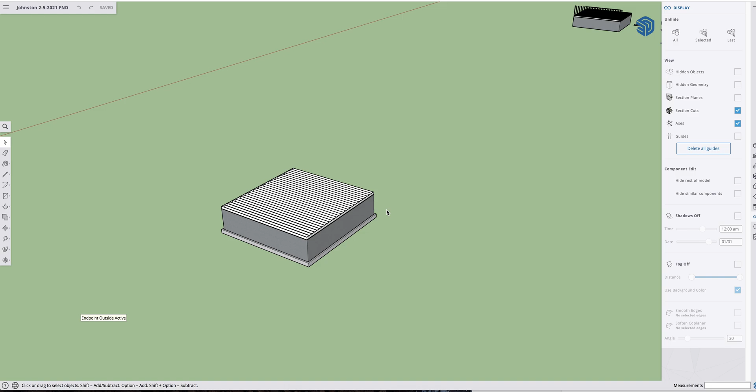Okay, this is a video on how to do the plywood for the floor on top of the floor framing. Carpenters call this the deck. We're going to build a deck, a little different than a deck that would be like outside in your backyard. So we've got the rim joist around the outside. We've got the bottom plate, which is that brown piece right there.

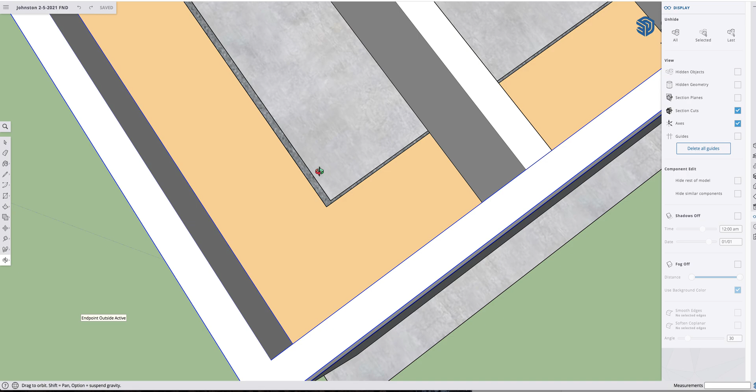Right. You will see a little space down there because the foundation wall is 8 inches wide, and this bottom plate is only 7.5, but that's normal. There's a little space there. So we've got the bottom plate, we've got the rim joist, we've got the common joists. Whenever there are multiples like that, they're called common joists, as opposed to some other joist that might be unusual.

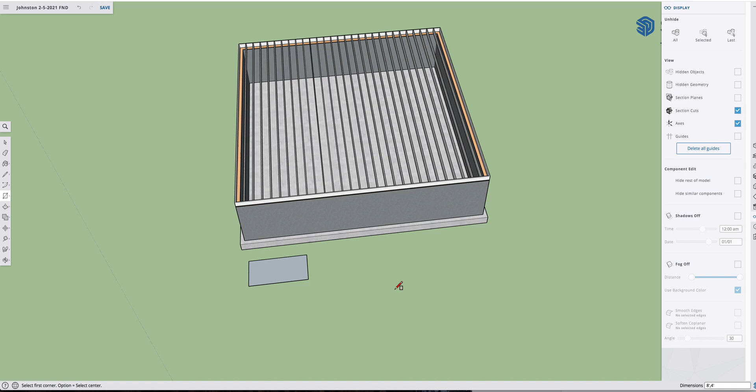And if the framing is going in this direction, the plywood's going to go the opposite direction. That's stronger. So we're going to hit R for rectangles. We're going to draw a piece of plywood that is going to be 8 feet, so 8 apostrophe, comma, 4 apostrophe. So 8 feet by 4 feet. Hit enter. And then we're going to hit push pull and pull it up 0.75, which is 3/4 of an inch. That's heavy duty plywood. We'll make this a group.

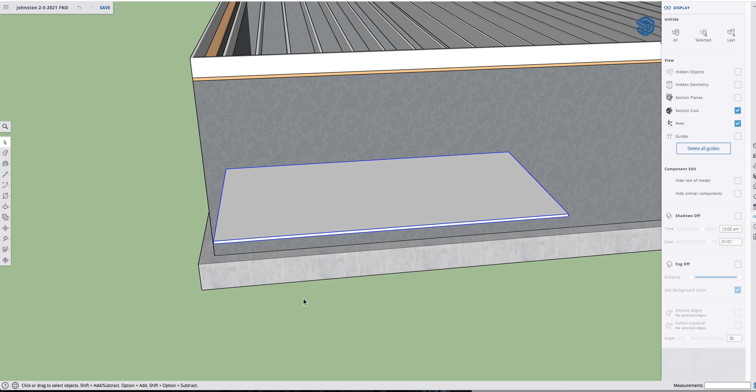Okay. Then I think maybe I'll grab it and put it right where it's supposed to be. Grab the bottom corner, and we'll stack it on top of this. Always a good idea to zoom in and make sure that it's actually sitting on top, because it could be sitting like this, and it might look right, but that's not. Sometimes it's a good idea to lift it up and then just set it back down so we know it's sitting right on top. Okay.

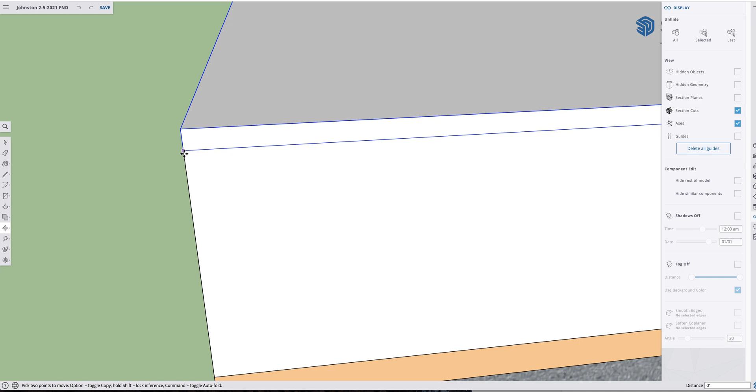So we could even do this at this point probably. This is 8 feet long, so if I move a copy, this is one time where it doesn't matter where you click on it. As long as you hit the correct arrow key so it's moving on the correct axis, we can move it out 8 feet times 4. Yep, that's good. That's all good.

Then maybe we could take these guys. So I'm going to hit the space bar and select this one. To add into the selection, I'm going to hold down Shift and Shift click this one, this one, this one. I'm trying to aim in between the floor joists because sometimes even though they're below it, you can accidentally select them. If I did accidentally select that, I can hold down Shift and just deselect it because it'll select or deselect as long as I have Shift held down. So this one, this one, this one, and this one.

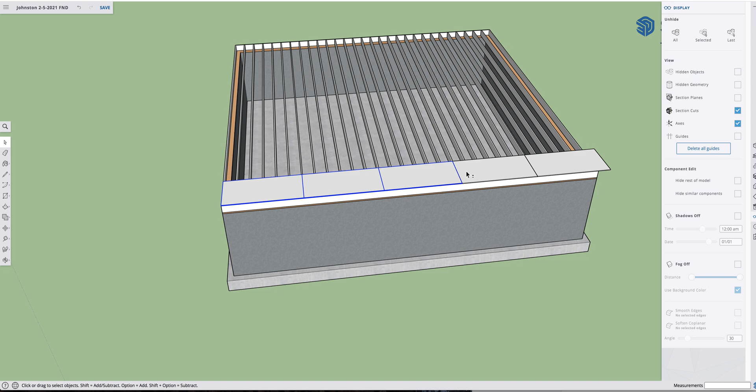Okay, we'll try this. I'm going to orbit out like this. I'm going to move a copy over. So these things are 4 feet wide, so I'm going to move a copy in the other direction. Make sure you hit the arrow key because we don't want it to go up or down. So we'll tell that to go over 4 feet or 48 inches. But that's no good because the seams, one seam runs into another.

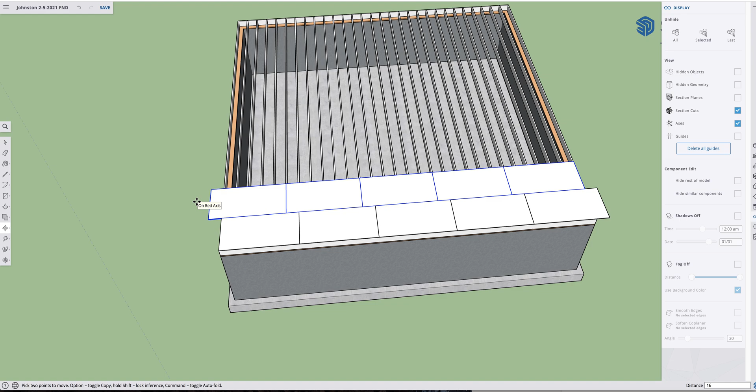That makes it weaker. So what we're going to do is we're going to take this whole line and we're going to shift it out this way on the axis. Come on, there we go. 16. And let's see how this end looks. It actually works out perfectly. That's lucky. All right, the only thing we have to do now is the carpenter would actually nail this on like that, and then he'd run the saw right down that line to chop it off.

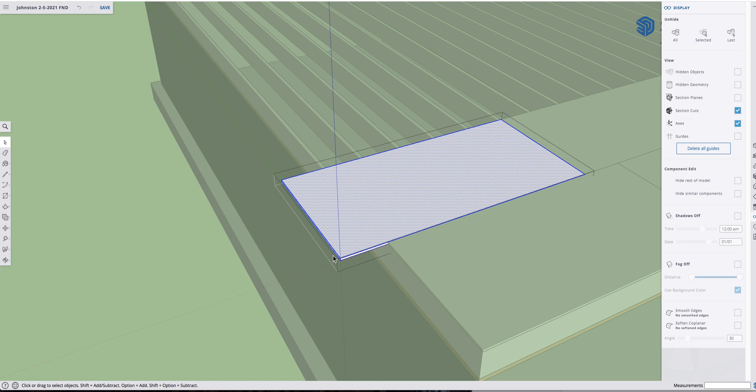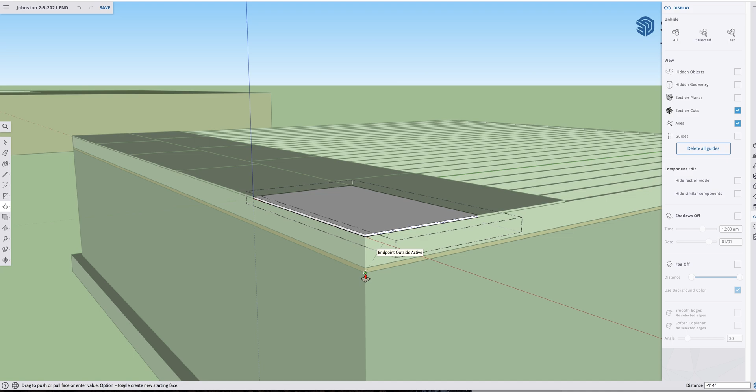What we'll do is we'll edit this one, and you got to zoom in, use push-pull, and we'll push it right back to the edge like that. So now we have 2 rows. That's good. We'll do the same thing over here. We'll push this one in so that it imitates the carpenter cutting this off. Just push that in and just touch this surface or touch a point on there. We got that. So this is going to work out pretty well.

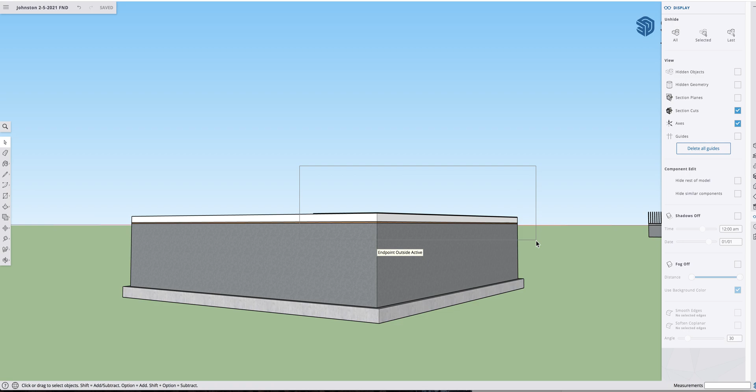Okay. I want to select all these. The way I do it is I orbit around like this, and I'm going to drag a box like that because I think the only thing that's completely in that box is those guys. You got to be a little careful with that, like if I did it over here like this, I might end up hitting something in the back, so you got to get like a clear view of that. So I'm going to select all those guys.

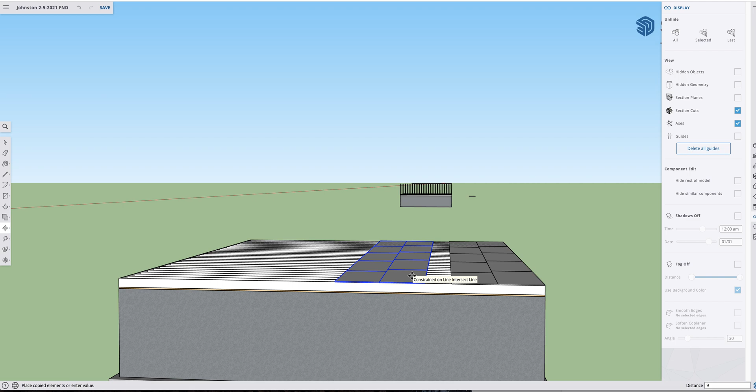Now each one of them is 4 feet wide. So when we move the copy over, we're going to move this on the axis this way. It's got to jump over two 4-footers, so we got to move over 8 feet that way times 4.